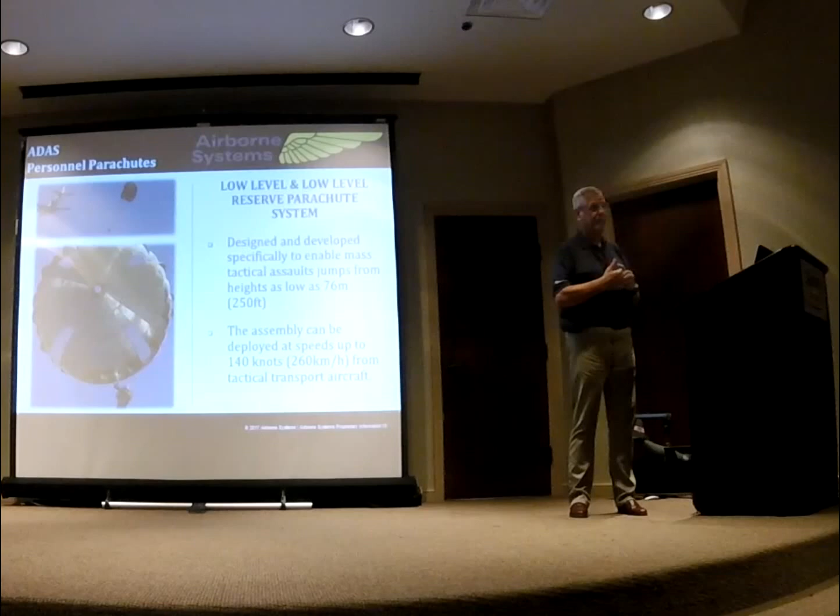You can't use a reserve though. But saying that, last year I was in Oman, and this is a snapshot I took on the drop zone. We dropped these guys in Oman, their special forces, at 300 foot, and they got an entanglement. They're the only force I know that actually still carries a reserve at that low level. They banged out the low-level parachute reserve that we made, and it actually worked. There's two guys wrapped up in it, and they both walked away from the drop zone, not a scratch. That proves how good I believe our round system is. I think if you'd been on a T10 at that height, you would not have walked away.

Anyway, going back to what else we do with the parachutes. We have this facility in the UK where we maintain all the parachutes, personnel and cargo, and everything is run through our facility in Letchworth, in the east of England. We just won this contract again.

I couldn't believe it. We've had this for years, and the MOD decided to re-tender it, and were going to give it to a French company. Luckily they saw sense that we couldn't have our parachutes being made and serviced in France when we were about to leave Europe. I'm sure you've seen that in the news. This is going to be a bit of a problem downstream.

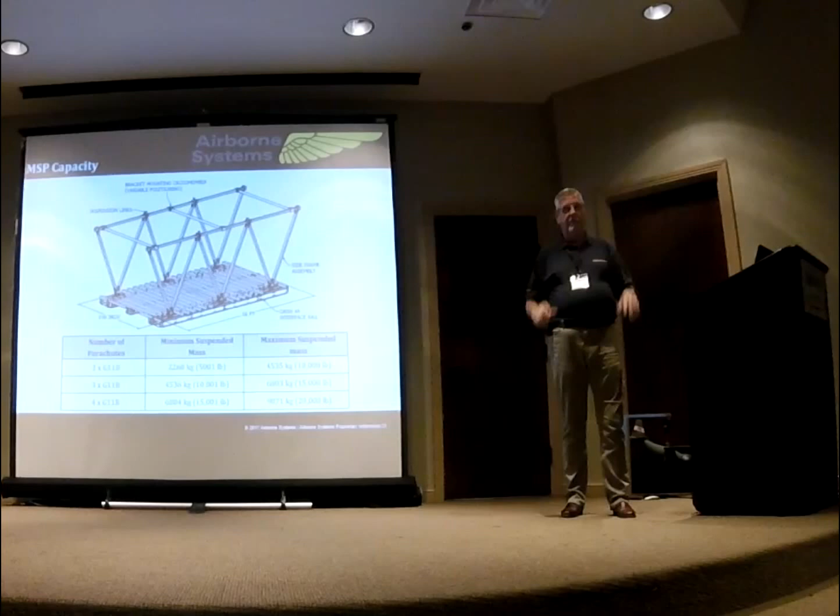This platform, we call it the car and cage. It's a very simple system where once you put your vehicle on, depending on the all-up mass and the number of parachutes you need, it's so easy to rig. No EDMs needed because it has airbags, so your airbags absorb all the impact shock, which saves a lot of time. You can literally drive on, use quick release straps to lash it down, put the parachutes on, which is the standard parachute system with the EFTC and all this kind of stuff. Works really, really well.

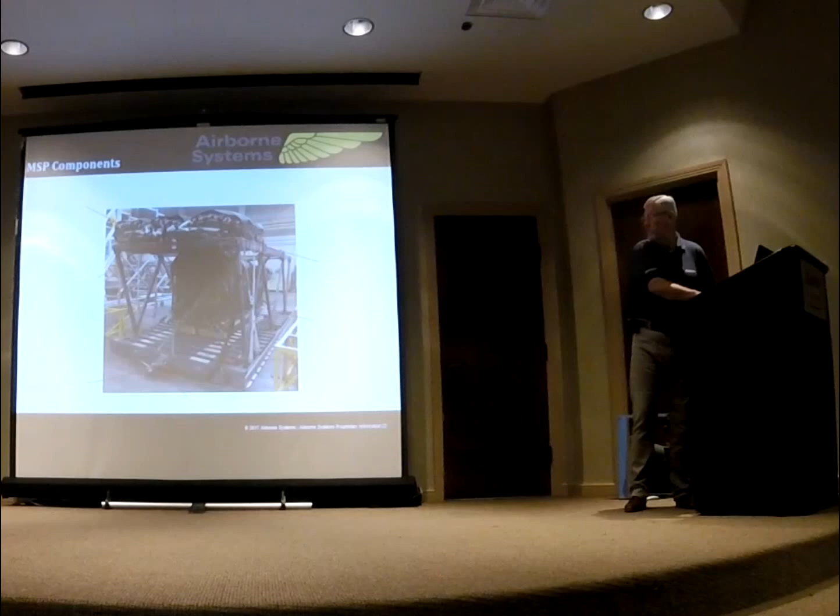Okay, so this is just the main training load, if you like. That's just a ballast load, you know, just to do training with. But if you look at it, it's a very simple system.

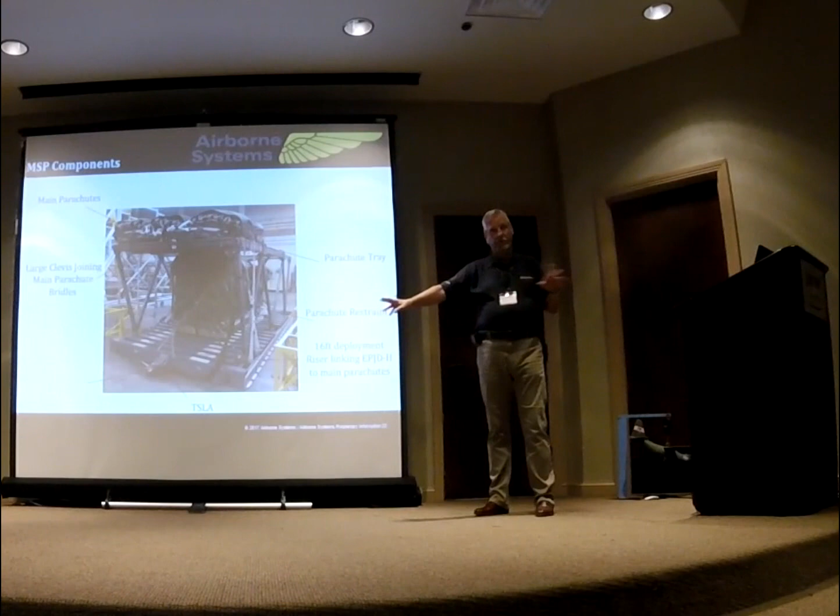It has the main parachutes on top of the load, just like a Type 5. It has an EFT system, but one thing it does have that is totally separate is a TSLA, which we're going to talk about in a moment. The UK doesn't like EFTC because they've had issues where the EFTC is released early, and the last thing you want is deployment taking place inside the aircraft. The TSLA stops that from happening. The guys from Natick have just been to see this system, and they're looking at getting TSLA on the US system. You guys will probably see TSLA, but I want to talk about that in a moment.

Okay, and I'll show you a little video on this. I think it should be next.

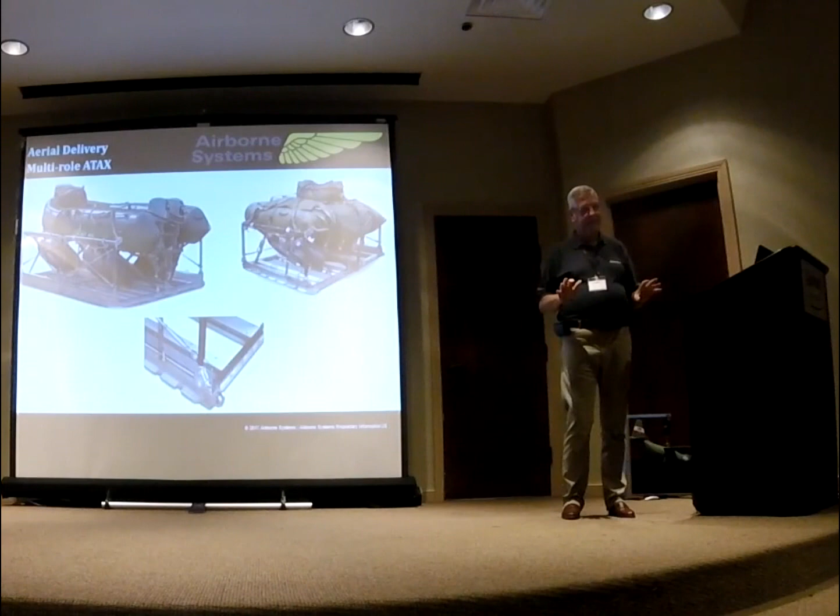No timer systems, nothing, because it has a sensor on it. As soon as it leaves the aircraft, it will open.

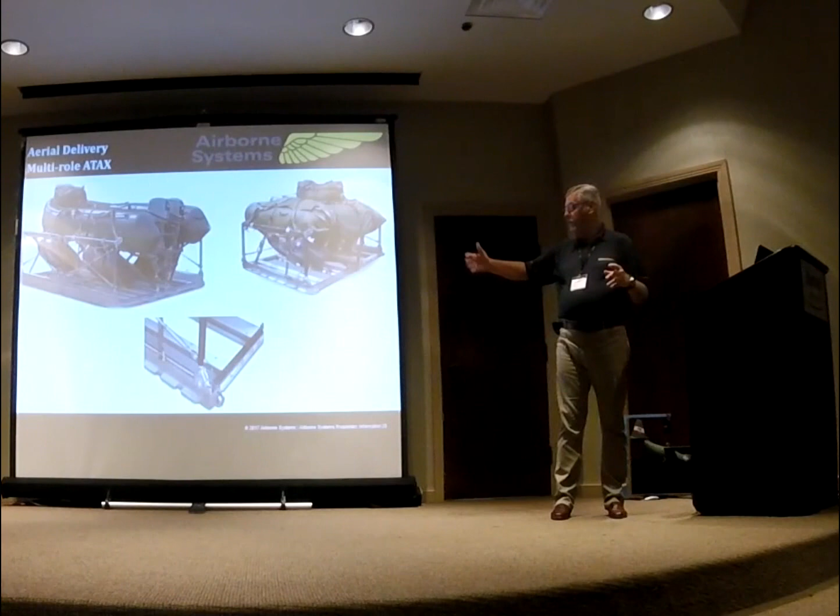But also with the ATAX platform, it's designed to replace land and marine, so you have one system that does both jobs. Just by removing the top surface and replacing the superstructure, which again is lightweight and portable, you can have it for small rigid raiding craft, for example. Very quick, very easy. At the moment, the only users of this system are the UK and Germany. It's so simple.

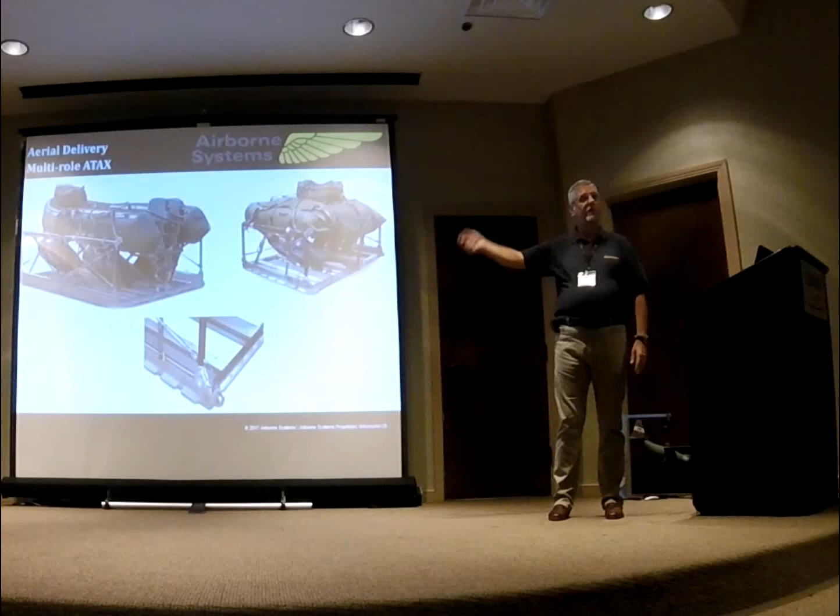Again, you can use it for tactical and training. If you want to sink it, you don't put these - here are buoyancy chambers - take them off, and the thing will sink. So it's a great, easy system.

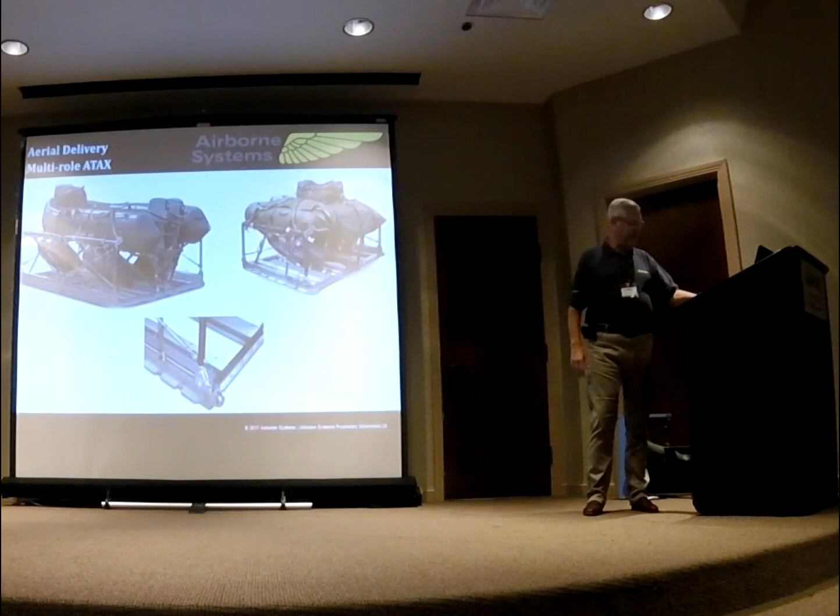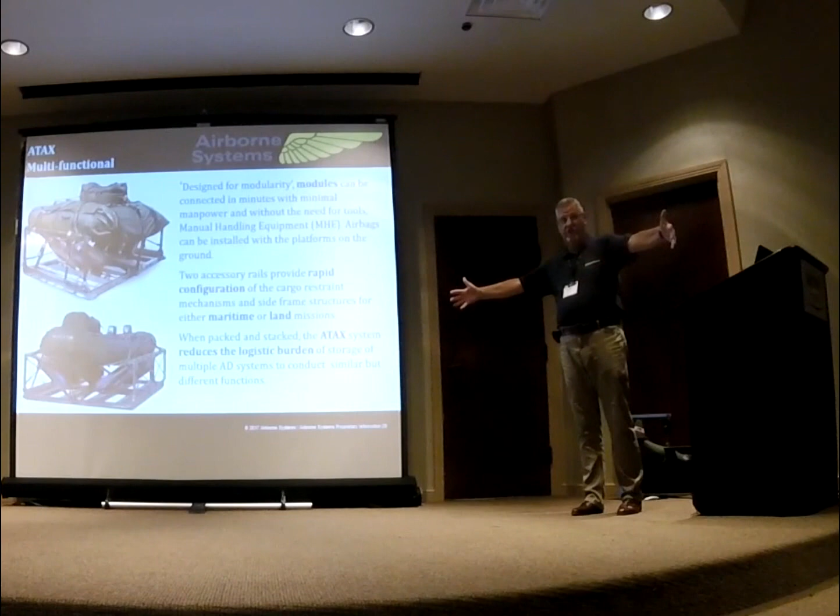This talks about the various rigging procedures. You can have it as a single module, or you can have it joined together in larger loads. But this is what I'm saying - this is the main system.

So there we are, there you can see that top panel. You literally push a button like you do in your car, with the bonnet opens or the boot opens. Up it comes, and in there you slot in your cassettes. Close it, put the payload on and restrain it, and then put your parachute on. Simple, easy stuff.

It really is, and this is what's going to replace the Type 5. This is going to be out there. The UK is testing it at the moment on the A400M. It's going to be rolled out across other NATO forces because the A400M is going to be used by over 15 different customers at the moment, and this is what they want.

They want something that's easy, cheap, reusable. Whereas the Type 5, we all know it's heavy, it's cumbersome, it breaks easy, you have to replace parts all the time. And I know that - I used to work for Pegwell, I used to make Type 5s. So I know this is a much better system, because I was an end user once.

Normally for that you would need a stack of EDM this big, and you still wouldn't reach that - you've already bent the Humvee chassis. Those in the airdrop world, as you know, see these vehicles used again and again for airdrop because the other ones are already broken - they'll crap off the drop zone, they can't drive the stuff. You don't get that problem with the ATAX system and the MSP airbag.

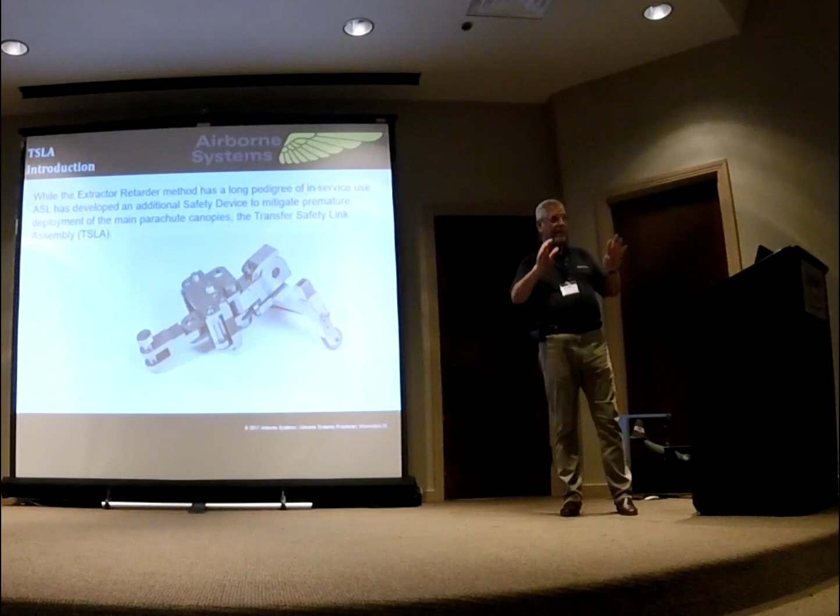But this is Europe - EFTC, no one likes EFTC. They have a tendency for the actual clam shell latch assembly to come loose, and you could start the deployment sequence inside the aircraft. That does happen, and it just happened most recently in Saudi Arabia - nearly took out the airplane.

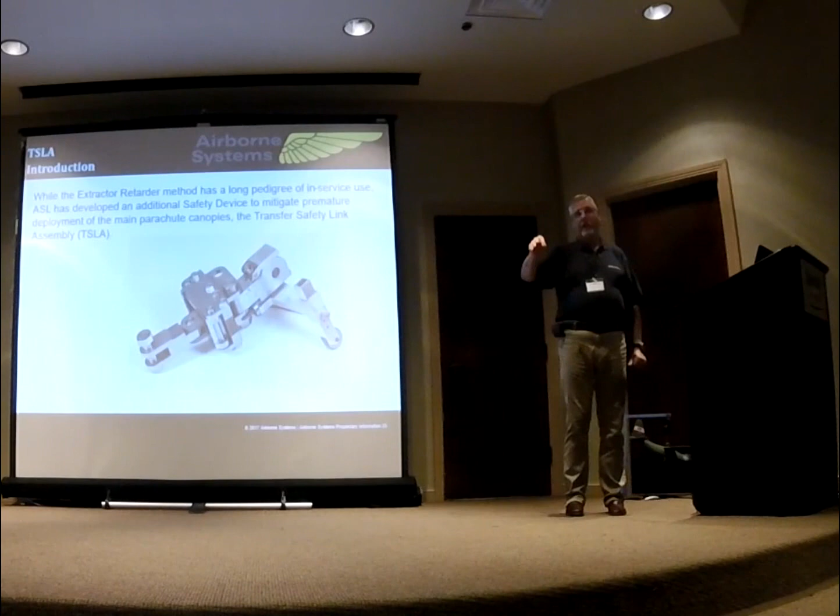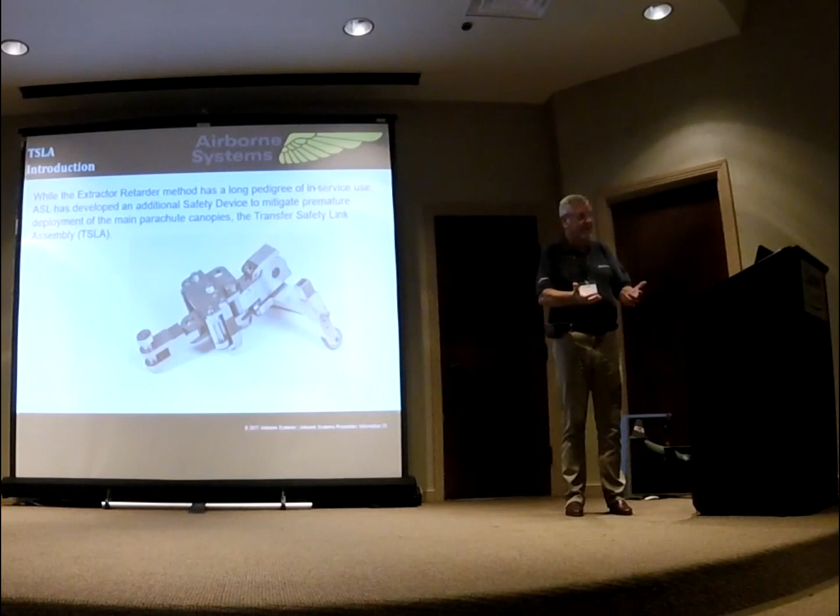So what we have to fit in Europe is a TSLA. This here is a separate safety system to ensure that no deployment can take place inside the aircraft. Yes, I know you have your EPJS, but that's just your extraction parachute - you can still get deployment after jettisoning the extractor bin. If you've broken those locks, that load's going to go - it's not going to stay in the airplane.

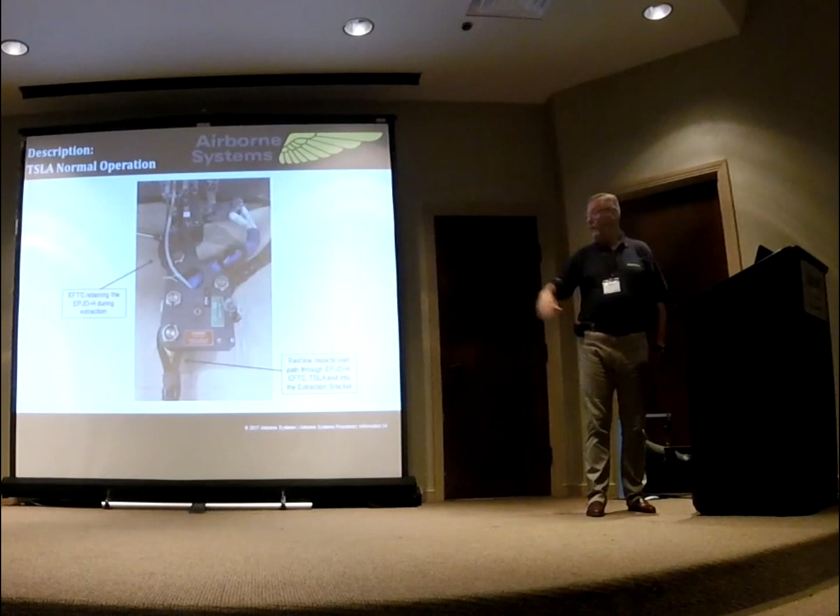So we fit this in, and it's a link between the EFTC, the EPJS, and the platform, and it ensures that no deployment can take place, because this link literally prevents that deployment line from actually starting that process. In Europe, you have to have it - Airbus will not certify an aircraft platform unless they can ensure that if it leaves the aircraft in malfunction, so be it, but nothing's going to happen inside the aircraft.

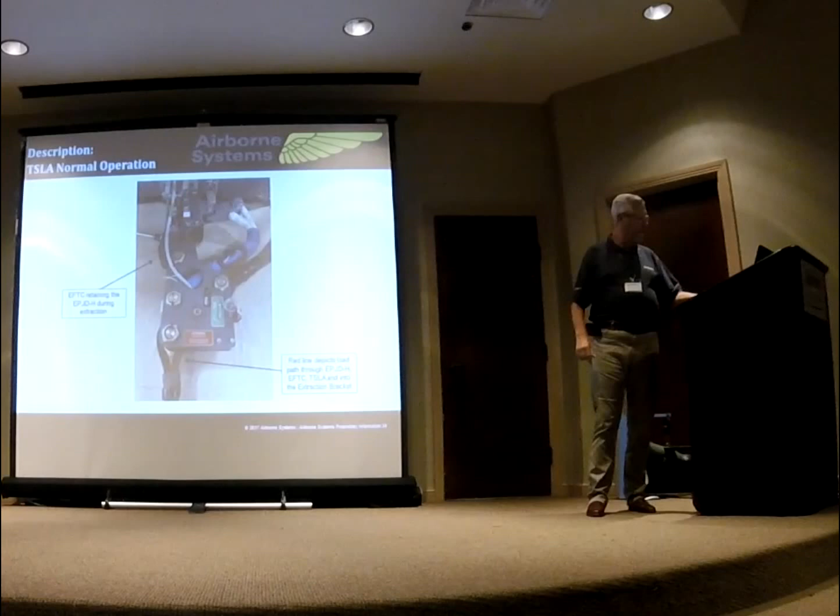I'll just move on a bit. So there it is in place. Once it's actually in line with the EFTC, you've got that normal extraction force happening, and the platform's extracted.

And again, it's a system the USA are looking at. They think that's much better than the EFTC. It's safer.